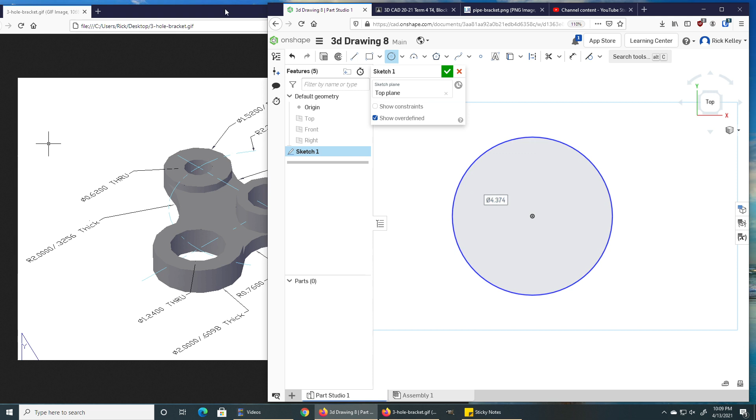I'm going to start a circle and make sure my radius or diameter is correct. Radius 2.24, so we're looking at a diameter of 4.48. I am going to press escape and mark that circle as a construction line.

Now I'm going to use a command we don't use all that often. I'm going to use the point command to help me place these two circles, because I want them to be on the top and side of this circle here.

So what I'm going to do is track from the center point straight up and put a point at the top of that circle. I'm going to track from the center point straight out and put a point on the side of that circle. Now if I locate some circles there, it knows exactly where they are, and I don't have to dimension them left and right. I'm just going to move that 4.48 out of the way a little bit, and I'm going to create some circles.

That hole has a diameter of 0.62, goes all the way through. It's surrounded by another ring that has a diameter of 1.52. That was the worst place to try to put that. Okay, there we go. Notice those two circles came in black already, not blue. Onshape knows exactly where they are because I already properly defined everything else.

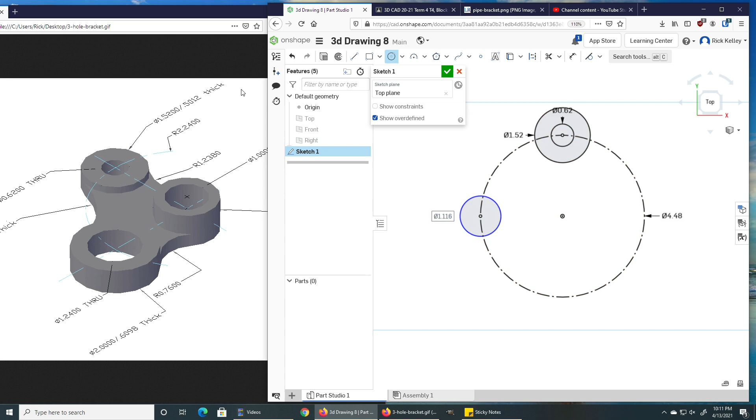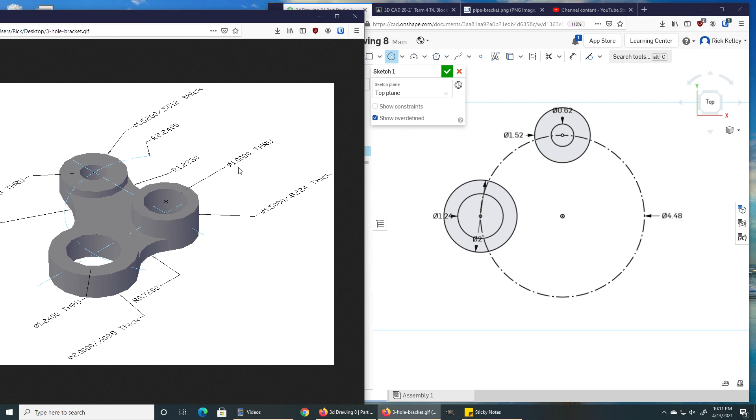Coming over here, we're looking for this hole now, 1.24. And we're looking for the ring around. I just did the same thing again. Center point, please. Looking for the ring around it. You can see that dimension down there of 2.0. And let's go to the center. I'm just going to move this drawing over a little bit. I can see that the hole is 1 and the ring around is 1.5.

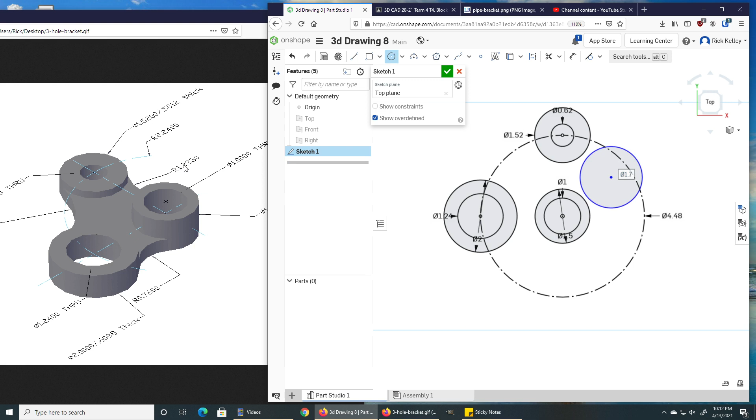Okay, I'm not done drawing circles. You'll notice that each of these is connected by an archway, an arc that has a radius. So all I'm going to do is eyeball some circles into place and then dimension them appropriately. So that one should have a radius of 1.238. I don't feel like doing that math, so I'm going to say it is 1.238 times 2, because we're looking at the diameter here.

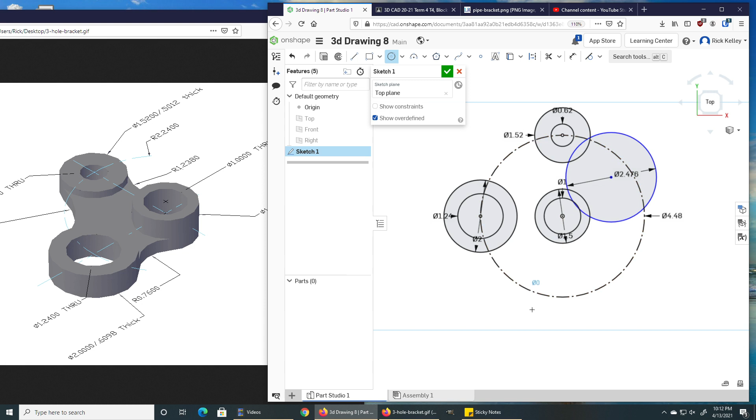I'm going to do the same at the bottom, 0.76, 0.76 times 2. And the same up here at the top. If I recall, yep, radius of 2. So, diameter 4.

Alright, all of these came in blue, even though I told it how big they were going to be. That's because it doesn't know where they are. We got to use some constraints. I'm going to use the tangent constraint, constrain it to touch that circle and that circle without crossing. Same here. This should touch there, and this should touch there. Here we go, one more set of constraints there and there.

Alright, it's a little bit messy right now. Let's clean it up so it looks like the outline of this object. I'm just going to switch over to the trim tool and start cutting away some of this stuff. I don't even need what's left of that construction line circle.

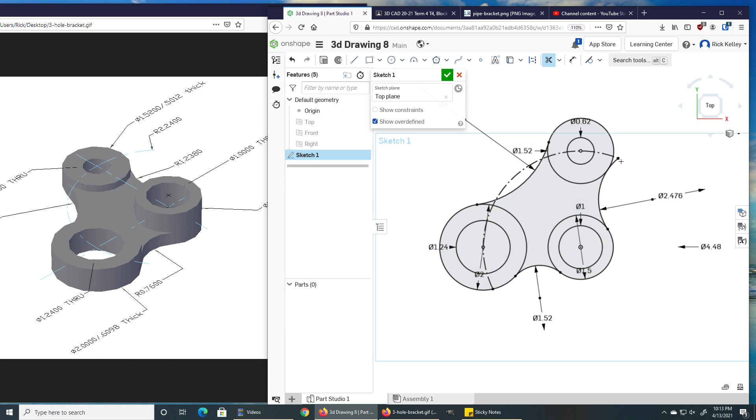I am going to leave it so it shows where those are, and so that it controls all of that, and if I wanted to come back at any point and change it, I could. But I am not leaving it for visual purposes here for us. There we go, that's all we need. Whoops, one more trim. Couldn't hurt to trim that little bit off.

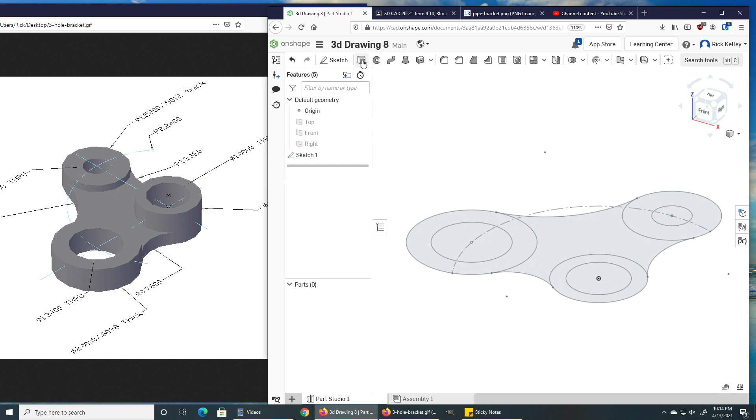Okay, there's our sketch. Now I'm going to go to a more three-dimensional view, and I'm going to use several different extrudes to do all the various thicknesses here. So extrude, I might as well start with the middle, and it is over here. There's an arrow touching the middle, 0.3256.

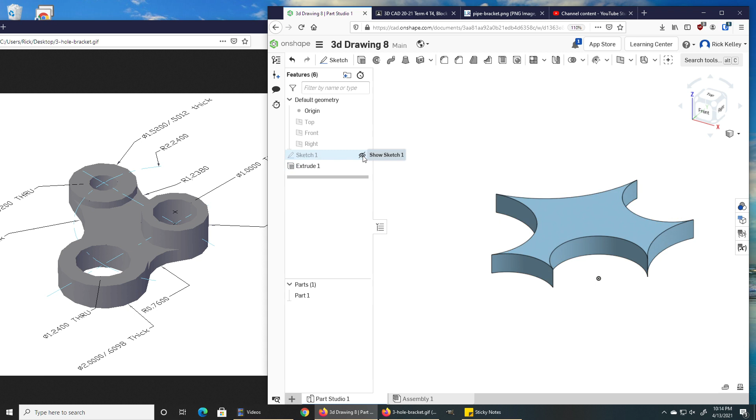And that's good. I'm going to turn my sketch back on because when you do that first extrusion, it hides it. I'm going to extrude this one up here, 0.5012. I'm going to hit OK.

I'm going to grab that one and extrude. That's this one here, so 0.6098. You may have noticed sometimes I start the extrude command first, sometimes I select the area I'm going to extrude first. It doesn't matter, it works both ways. The last one has a thickness of 0.8224.

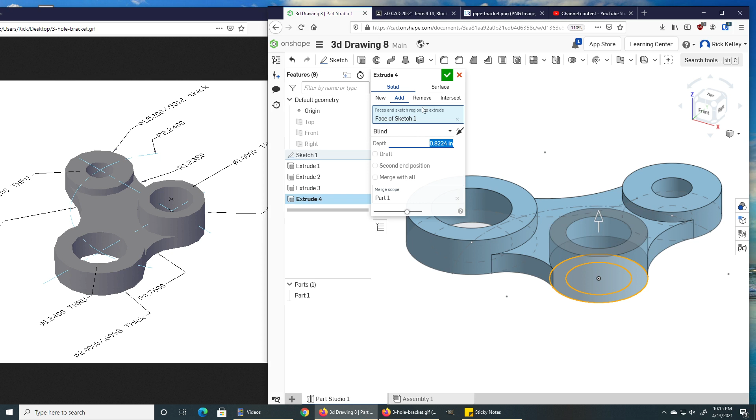And if we turn the sketch off, zoom out and take a look around, our object is complete. That is what you should have.